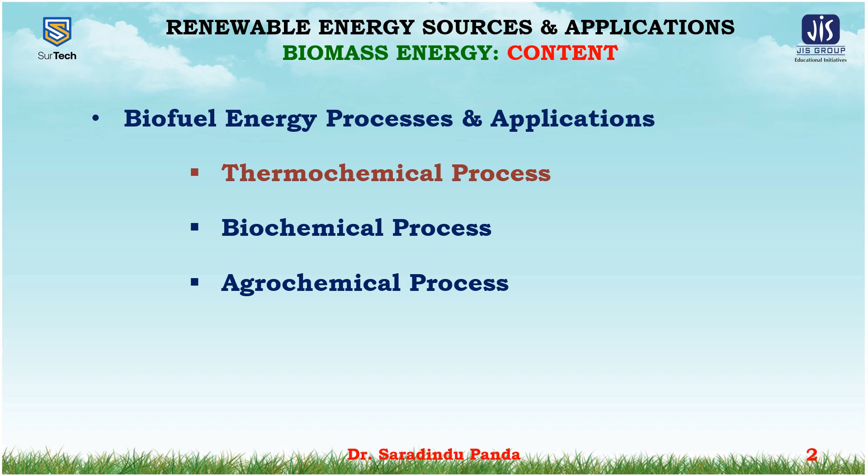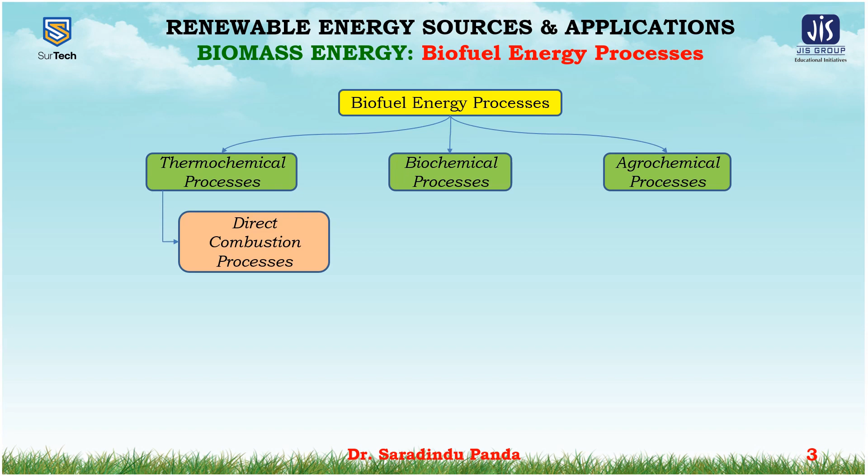In my today's lecture, I want to discuss the biofuel energy processes and applications. This is the continuation lecture of the previous lecture on the thermochemical processes. In the previous lecture, I already described direct combustion processes of the thermochemical processes. In my today's lecture, I want to discuss the pyrolysis process and the other thermochemical processes. In future, I want to discuss the biochemical processes and the agrochemical processes.

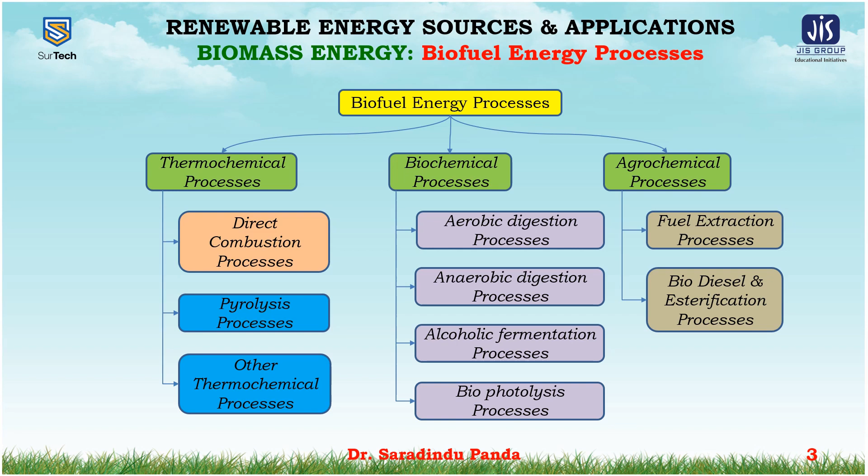So now come to the pyrolysis. Pyrolysis is called the destructive distillation. The pyrolysis is a general term for all the processes whereby the organic material is heated or partially combusted with the minimal air to produce the secondary fuels and the chemicals products.

Biomass pyrolysis is the thermal decomposition of the biomass occurring in the absence of oxygen. It is the fundamental chemical reaction that is the precursor of both the combustion and the gasification processes, and occurs naturally in the first 2 seconds.

The input may be wood, biomass residues, and municipal waste or indeed coal. The products of the biomass pyrolysis include biochar, bio-oil, and gases including methane, hydrogen, carbon monoxide, and carbon dioxide.

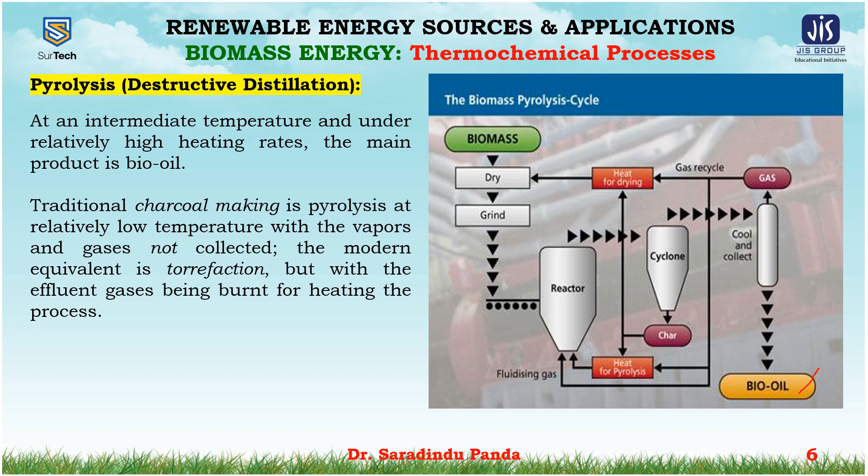Traditional charcoal making is pyrolysis at relatively low temperature with the vapors and gases not collected. The modern equivalent is the torrefaction, but with the effluent gases being burned for heating the process. Gasification is pyrolysis adapted to produce a maximum amount of the secondary fuel gases.

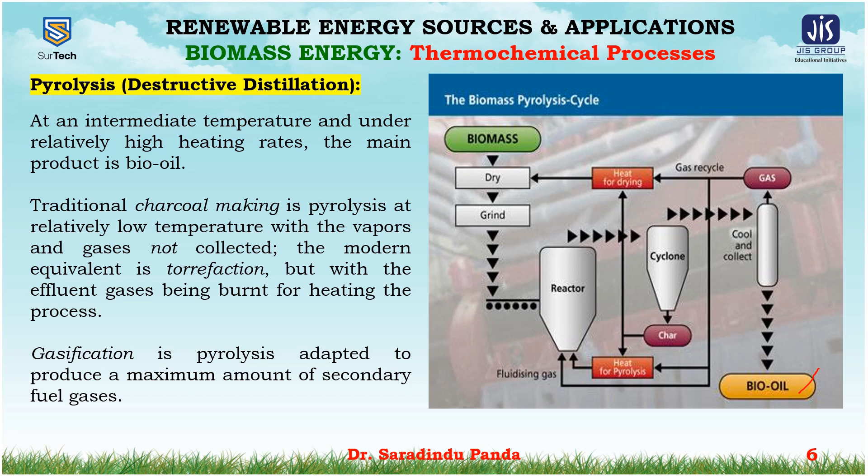Pyrolysis can be performed at relatively small scale and at remote locations, which enhances the energy density of the biomass resource and reduces the transport and handling cost. Pyrolysis offers a flexible and attractive way of converting solid biomass into an easily stored and transported liquid, which can be successfully used for the production of heat, power, and chemicals.

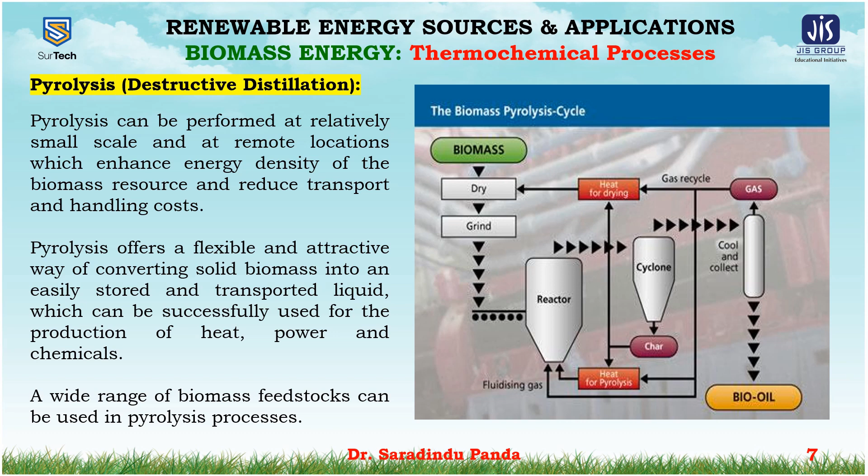A wide range of biomass feedstocks can be used in the pyrolysis processes. The pyrolysis process is very dependent on the moisture content of the feedstock, which should be around 10%. The efficiency is measured as the heat of combustion of the secondary fuels produced divided by the heat of combustion of the input biomass as used.

Large efficiencies of 80 to 90% can be reached. For instance, gasifiers from wood can produce 80% of the initial energy in the form of combustible gas, predominantly hydrogen and carbon monoxide producer gas, suitable for operation in converted petroleum fuel engines.

In this way, the overall efficiency of electricity generation, say 80% into 30%, that is 24%, could be greater than that obtained with a steam boiler. Such gasifiers are potentially useful for small scale power generation, which is less than 150 kilowatt.

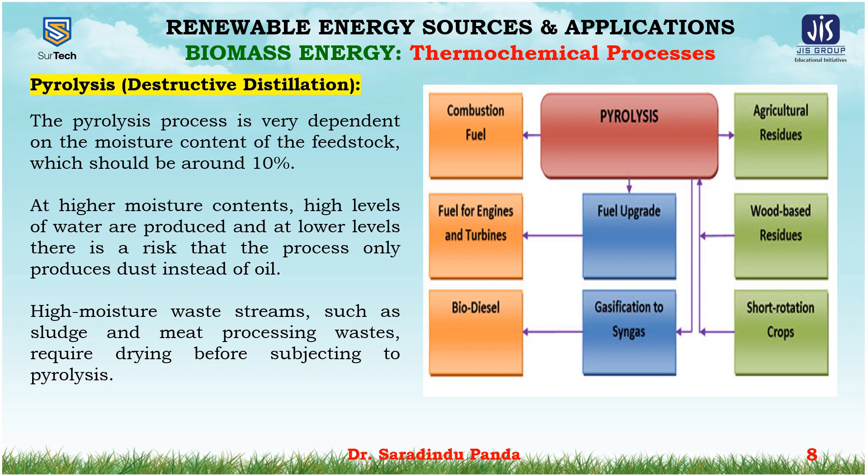At higher moisture contents, high levels of water are produced, and at lower levels there is a risk that the process only produces dust instead of oil. High moisture waste streams such as sludge and meat processing waste require drying before being subjected to the process.

Efficiency and the nature of the pyrolysis process is dependent on the particle size of the feedstock. Most pyrolysis technologies can only process small particles to a maximum of 2 mm, keeping in view the need for rapid heat transfer through the particle. The demand for small particle size means that the feedstock has to be size-reduced before being used for pyrolysis. Pyrolysis processes can be categorized as slow pyrolysis or fast pyrolysis.

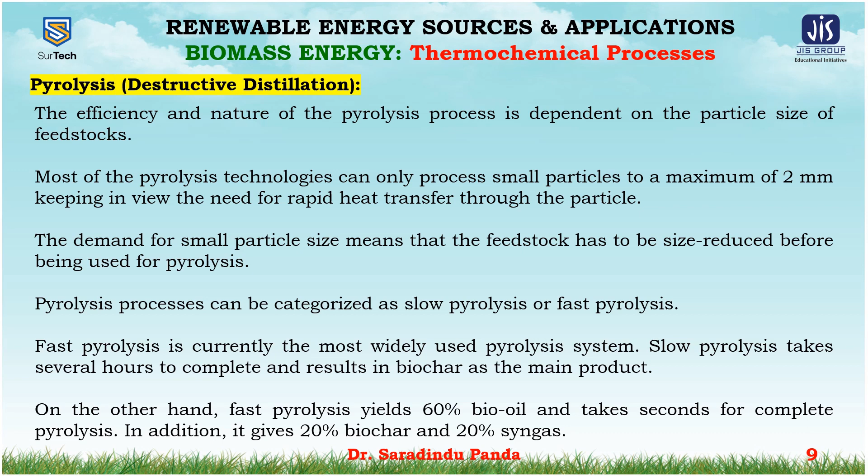Fast pyrolysis is currently the most widely used pyrolysis system. Slow pyrolysis takes several hours to complete and results in biochar as the main product. On the other hand, fast pyrolysis yields 60% bio-oil and takes only seconds to complete. In addition, it gives 20% biochar and 20% syngas.

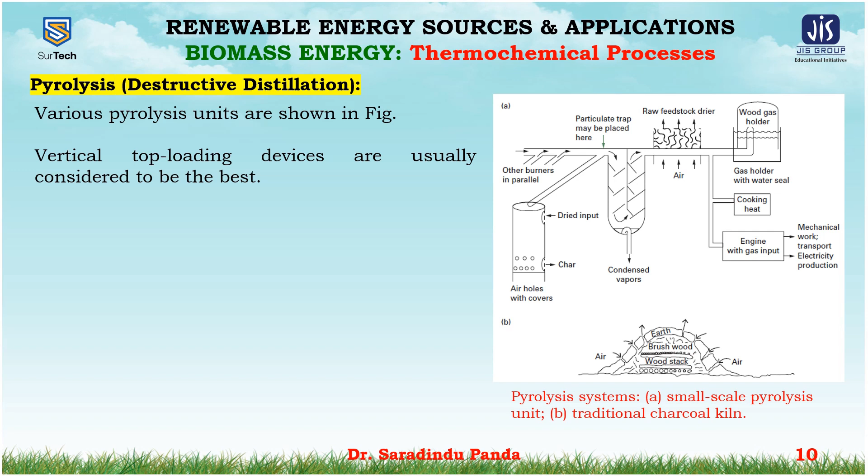Vertical top loading devices are usually considered the best. The fuel products are more convenient, clean and transportable than the original biomass. The chemical products are important as chemical feedstock for further processes or as directly marketable goods.

Partial combustion devices, which are designed to maximize the amount of combustible gas rather than the char or the volatiles, are usually called gasifiers.

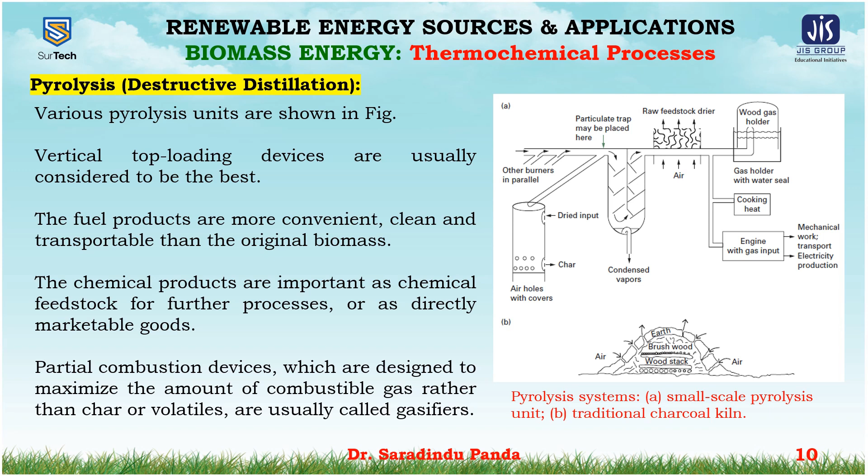The chemical processes in pyrolysis are closely related to similar distillations of coal to produce synthetic gases, tars, oils and coke. For instance, the large-scale use of piped town gas, like hydrogen and carbon monoxide, in Europe before the change to fossil natural gas, mainly methane, was possible from the reaction of water on heated coal with reduced air supply: H2O plus C equals H2 plus CO, and C plus O2 equals CO2, and CO2 plus C equals 2CO.

The input materials need to be graded to remove excessive non-combustible material, like soil or metal, dried if necessary. Usually completely dry material is avoided with gasifiers, unlike boilers, chopped or shredded and then stored.

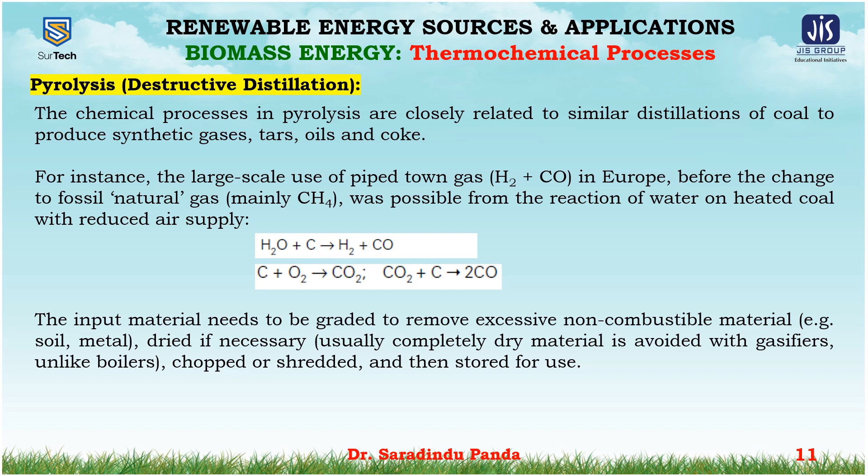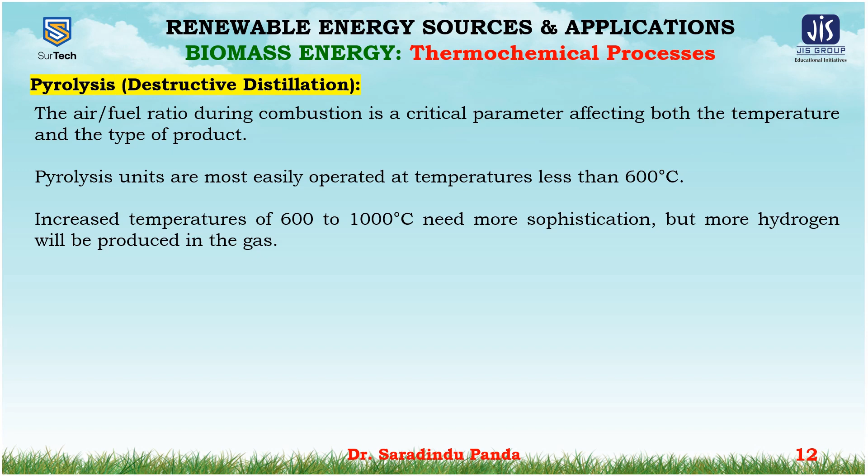The air to fuel ratio during combustion is a critical parameter affecting both the temperature and the type of product. Pyrolysis units are most easily operated at temperatures less than 600 degrees centigrade. Increased temperatures of 600 to 1000 degrees centigrade need more sophistication, but more hydrogen will be produced in the gas.

At less than 600 degrees centigrade, there are generally 4 stages in the distillation process. Number 1 is 100 to 120 degrees centigrade: the input material dries with the moisture passing up through the bed.

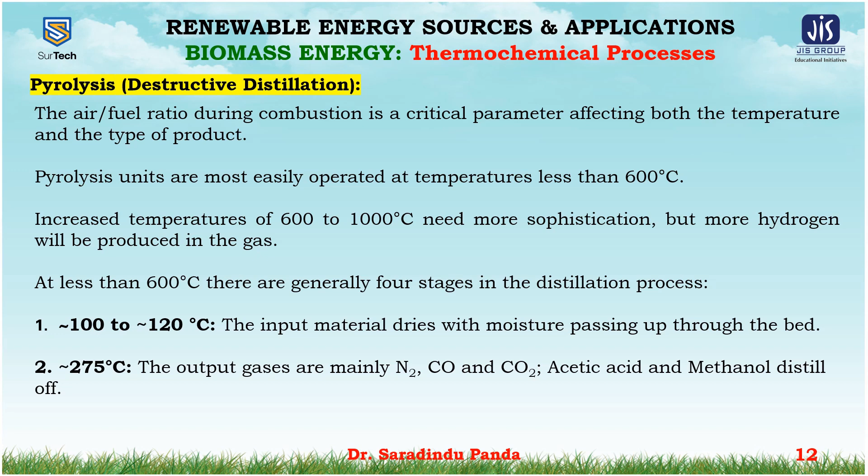Second is approximately 275 degrees centigrade. The output gases are mainly nitrogen, carbon monoxide, carbon dioxide, acetic acid, and methanol distillate.

Third is 280 to 350 degrees centigrade. Exothermic reactions occur in this range, driving off complex mixtures of chemicals like ketones, aldehydes, phenols and esters, carbon dioxide, carbon monoxide, methane, ethane and hydrogen.

Certain catalysts like zinc chloride enable these reactions to occur at lower temperature.

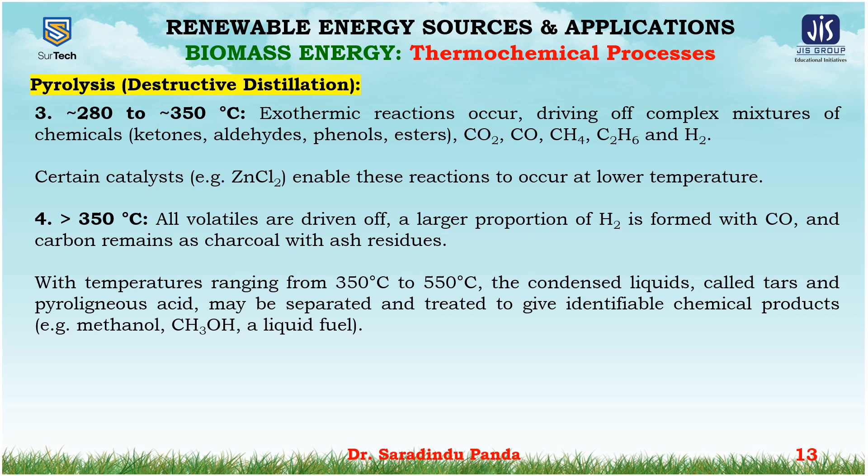Greater than 350 degrees centigrade, all the volatiles are driven off. A larger proportion of hydrogen is formed with carbon monoxide, and the carbon remains as charcoal with ash residues. With temperatures ranging from 350 to 550 degrees centigrade, the condensed liquids called tars and pyroligneous acid may be separated and treated to give identifiable chemical products like methanol, CH3OH, a liquid fuel.

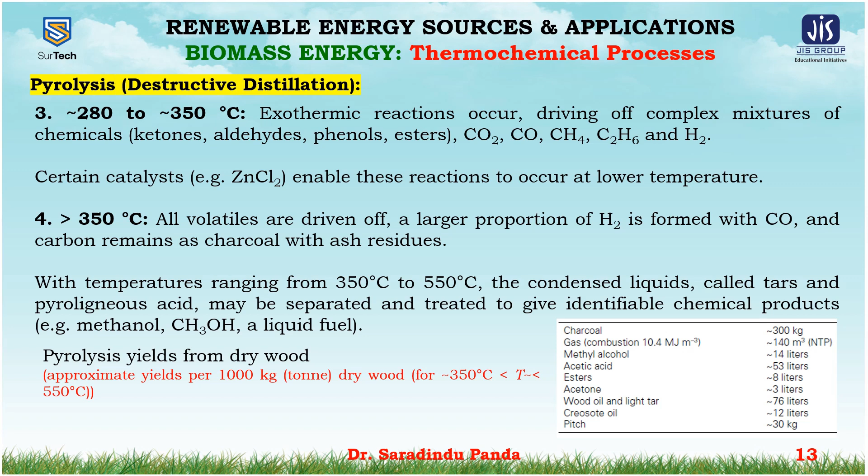The charcoal is 300 kg, the gas is 140 cubic meters, methyl alcohol is 14 liters, acetic acid is 53 liters, esters 8 liters, acetone 3 liters, wood oil 76 liters, and creosote oil is 12 liters and pitch is 30 kg.

Now, pyrolysis destructive distillation: the solid charcoal mass yield is 25 to 35% maximum. Modern charcoal retorts operating at about 600 degrees centigrade produce 25 to 35% of the dry matter biomass as charcoal.

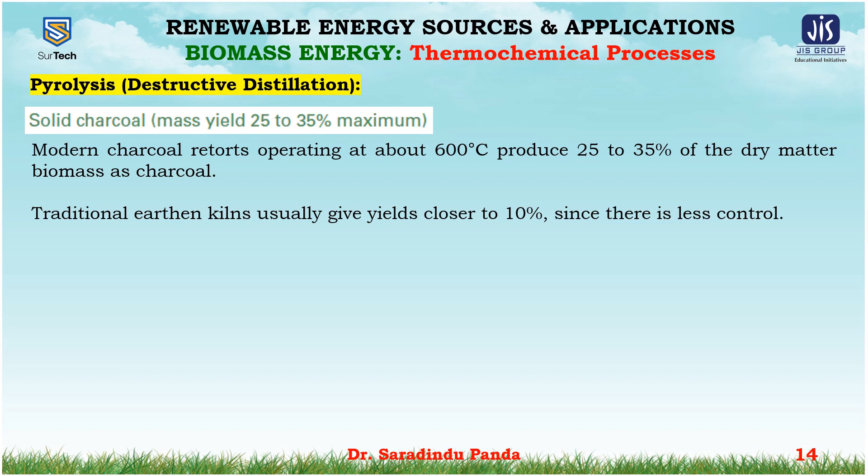Traditional earthen kilns usually give yields closer to 10% since there is less control.

Charcoal is 75 to 85% carbon unless great care is taken to improve the quality, and the heat of combustion is about 30 megajoules per kg.

Thus, if charcoal alone is produced from wood, between 15 and 50% of the original chemical energy of combustion remains. Charcoal is useful as a clean, controllable fuel.

Chemical grade charcoal has many uses in laboratory and industrial chemical processes. Charcoal is superior to coal products for making high quality steel.

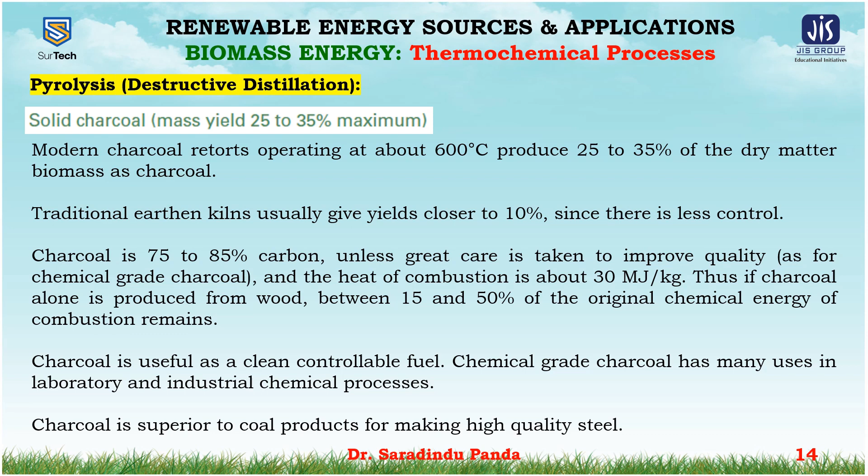Now torrefaction. This is a form of pyrolysis at reduced temperature, 200 to 320 degrees centigrade, with the effluent gases being used for heating. The product is a dry, non-rotting solid char, sometimes called biocoal, that subsequently can be burnt efficiently with minimum pollution.

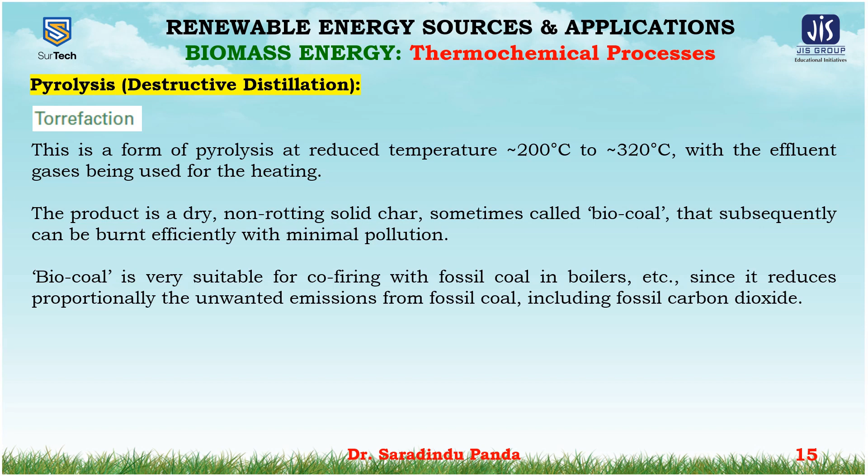Biocoal is very suitable for co-firing with fossil coal in boilers, since it proportionally reduces the unwanted emissions from the fossil coal, including fossil carbon dioxide.

Typically, the product retains 80% of the mass and 90% of the heating value of the original biomass. Its characteristics can be improved further by densification.

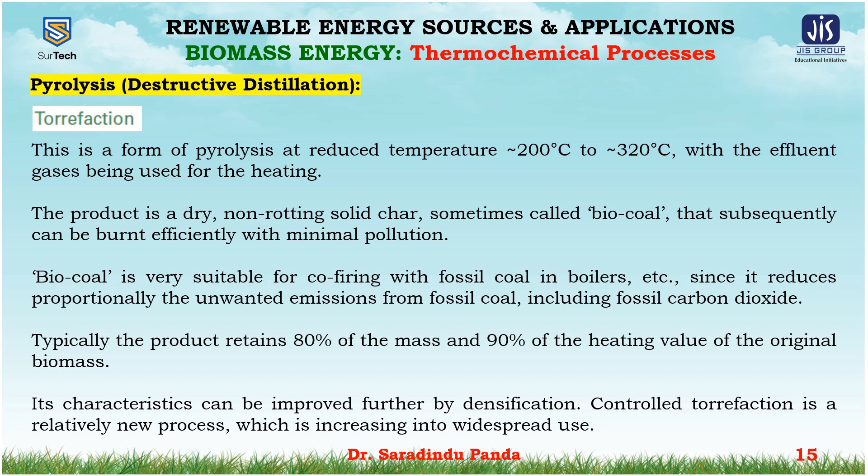Controlled torrefaction is a relatively new process which is increasingly coming into widespread use.

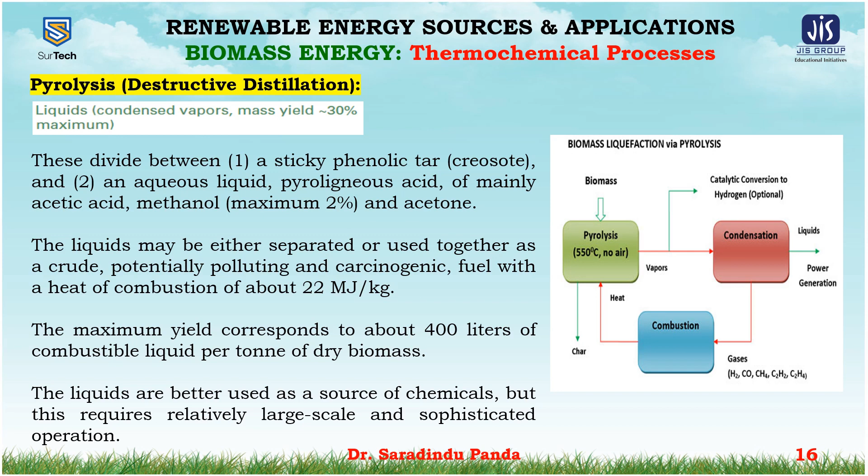The liquid condensed vapor mass yield 30% maximum in pyrolysis. These divide between a sticky phenolic tar called creosote and an aqueous liquid called pyroligneous acid, consisting mainly of acetic acid, methanol (maximum 2%), and acetone. The liquids may be either separated or used together as a crude, potentially polluting and carcinogenic fuel, with a heat of combustion of about 22 megajoules per kg. The maximum yield corresponds to about 400 liters of combustible liquid per ton of dry biomass.

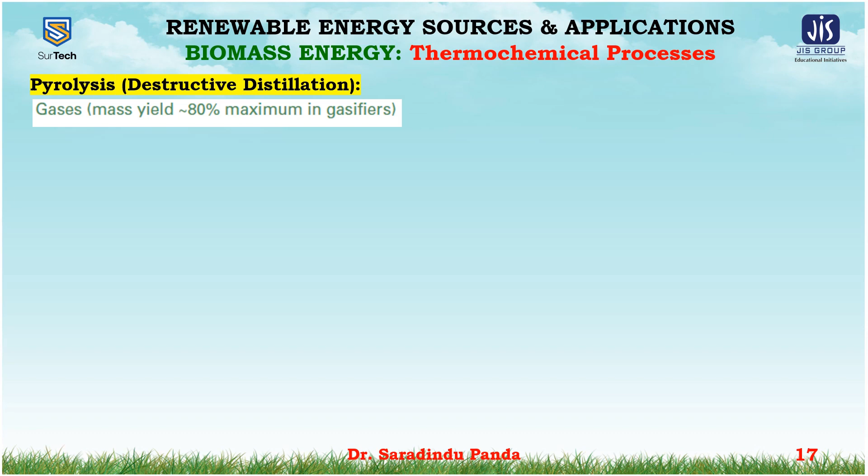The gases mass yield 80% maximum in the gasifiers. The mixed gas output with nitrogen is known as wood gas, synthesis gas, producer gas, or water gas, and has a heat of combustion in air of 5 to 10 megajoules per cubic meter. It may be used directly in diesel cycle or spark ignition engines with adjustment of the fuel injector or carburetor, but extreme care must be taken to avoid intake of ash and condensable vapors. The gas is mainly nitrogen, hydrogen, carbon monoxide, with perhaps a small amount of methane. The gas may be stored in gas holders near atmospheric pressure, but this is not convenient.

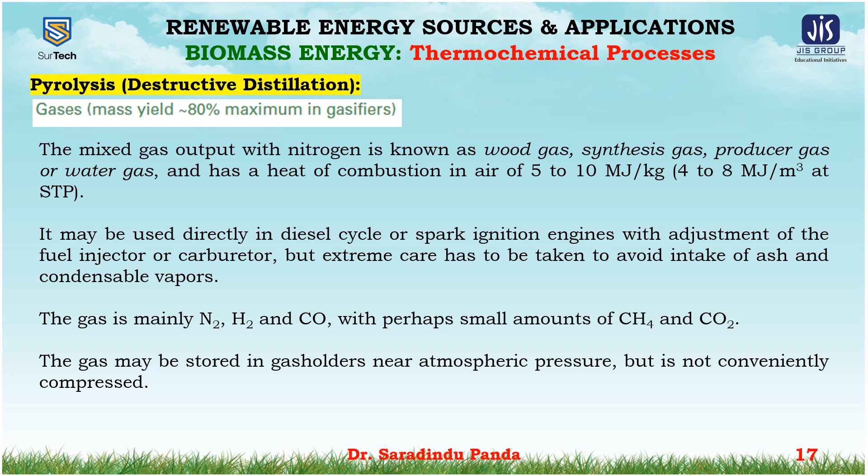A much cleaner and more uniform gas may be obtained by gasification of charcoal rather than wood, since the majority of the tars from the original wood have already been removed.

The Fischer-Tropsch process is a general term for a wide variety of methods that convert carbon monoxide and hydrogen, the main gases of synthesis gas, like producer gas, into fuel suitable for vehicles. Coal has been the starter material used to generate the initial producer gas, but biomass can also be the starter material.

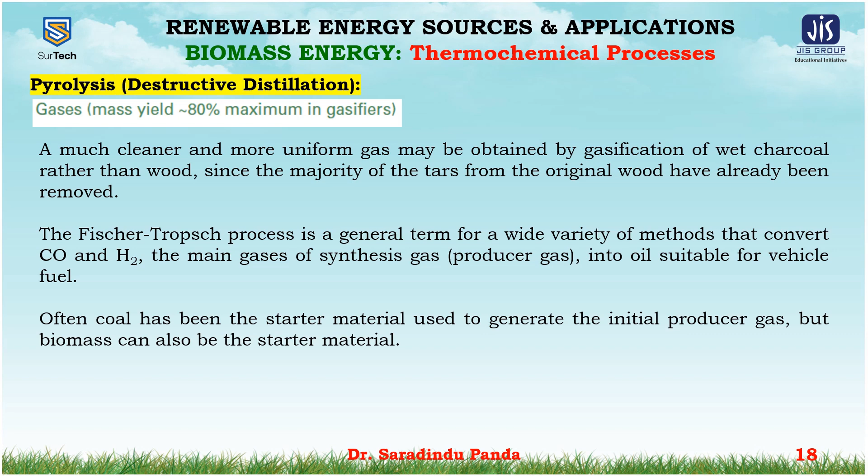Now let's come to gasification. The term gasification commonly refers to high temperature thermochemical conversion, with the product gas called producer gas. It involves burning the biomass without sufficient air for full combustion, but with enough air to convert the solid biomass into a gaseous fuel. This is the gasifier.

The producer gas consists primarily of carbon monoxide, hydrogen, carbon dioxide, and nitrogen, and has a heating value of 4 to 6 megajoules per cubic meter, or 10 to 15% of the heating value of natural gas.

The gasification of biomass takes place in a restricted supply of oxygen and occurs through initial devolatilization of the biomass, combustion of the volatile material and char, and further reduction to produce a fuel gas rich in carbon monoxide and hydrogen. This combustible gas has a lower calorific value than natural gas but can still be used as fuel for boilers, engines, and potentially for combustion turbines after cleaning the gas stream of tars and particulates.

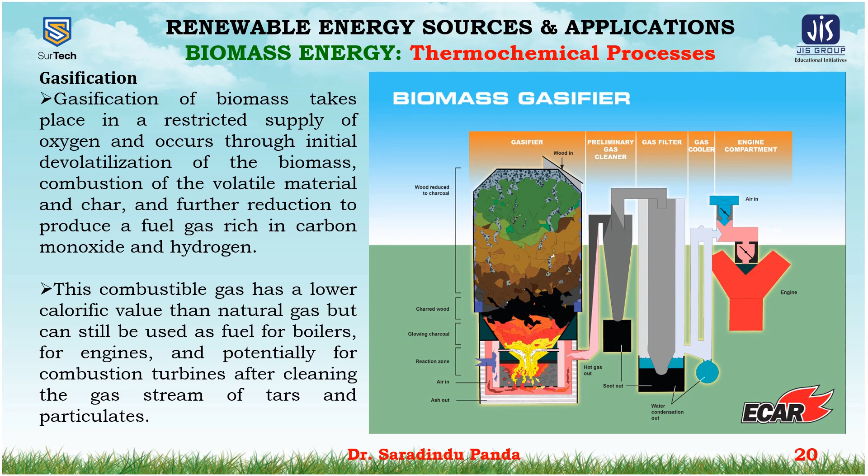The intended use of the gas and the particular characteristics of the biomass—its size, texture, and moisture content—determine the design and operating characteristics of the gasifier and associated equipment. The gas is cooled, then cleaned, then it goes to gas utilization or the engine.

If the gasifiers are air blown, the atmospheric nitrogen dilutes the fuel gas to a level of 10 to 14% of the calorific value of natural gas. Oxygen and steam blown gasifiers produce a gas with a somewhat higher calorific value. Pressurized gasifiers are under development to reduce the physical size of the major equipment items.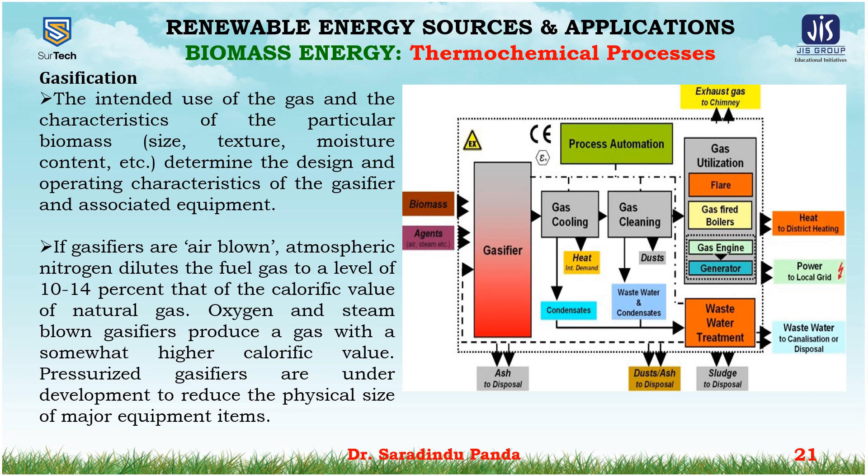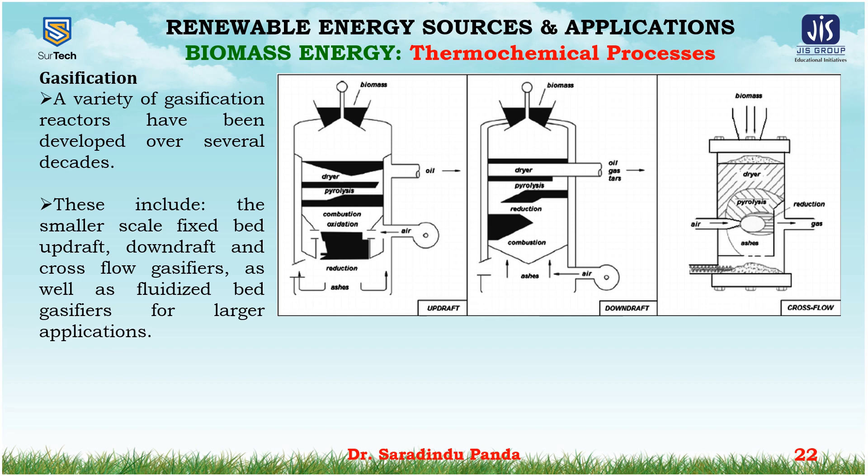There are three types of gasifiers: updraft, downdraft, and cross flow. This includes the smaller scale fixed bed updraft, downdraft, and cross flow gasifiers, as well as the fluidized bed gasifiers. Here the fixed bed updraft, downdraft, and cross flow gasifiers are shown in the figure.

At the small scale, downdraft gasifiers are noted for their relatively low tar production but are not suitable for fuels with a low ash melting point. They also require the fuel moisture levels to be controlled.

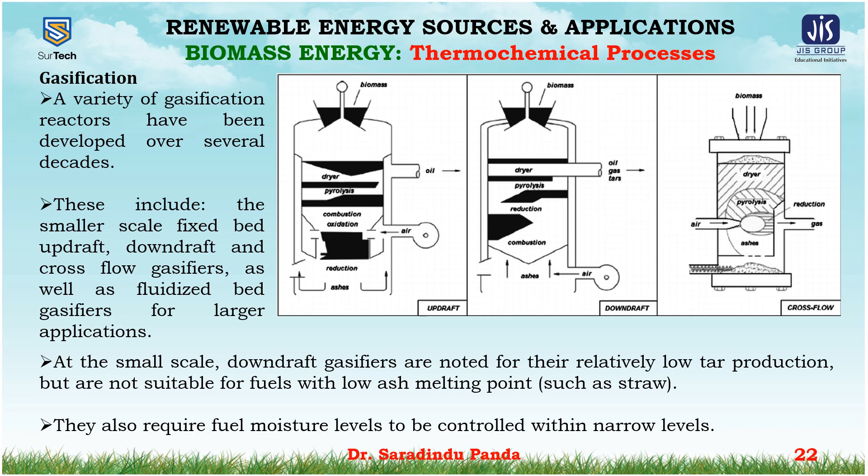Now come to the fixed bed updraft gasifier as shown in the figure. This is the oldest and simplest type of gasifier, the counter current or updraft gasifier. The air intake is at the bottom, and the gas leaves at the top through this exhaust. Near the grate at the bottom, this is the grate.

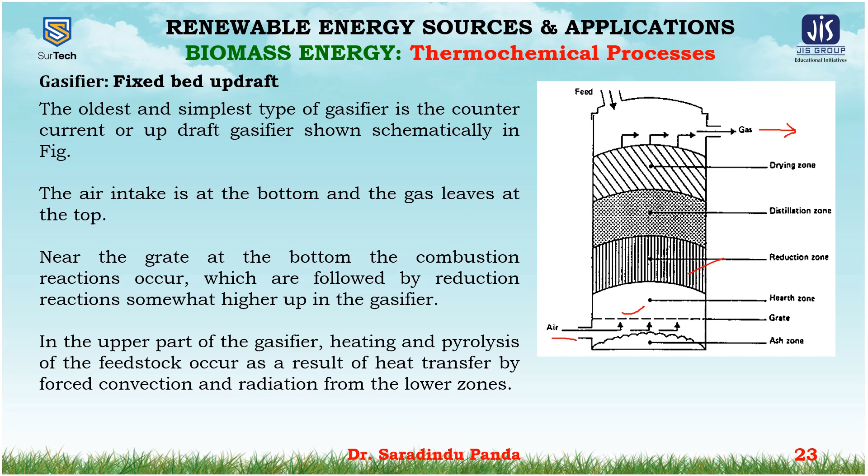The combustion reactions occur near the grate, followed by reduction reactions somewhat higher up in the gasifier; this is the reduction zone. In the upper part of the gasifier, heating and pyrolysis of the feedstock occur due to heat transfer by forced convection and radiation from the lower zones. This is the distillation zone and this is the drying zone.

The tars and volatiles produced during this process will be carried in the gas stream. Ashes are removed from the bottom of the gasifier; this is the ash zone from where the ash is collected.

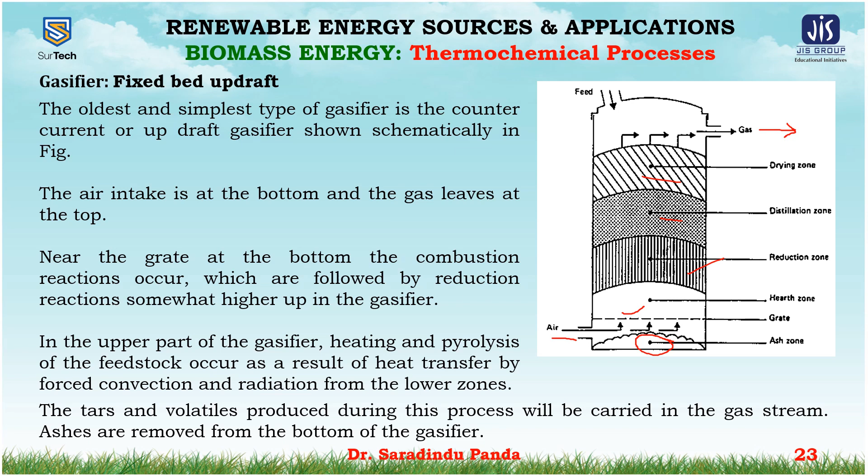Next, the fixed bed updraft. The major advantages of this type of gasifier are its simplicity, high charcoal burnout, and internal heat exchange leading to low gas exit temperatures and high equipment efficiency, as well as the possibility of operation with many types of feedstock like sawdust, cereal hulls, etc.

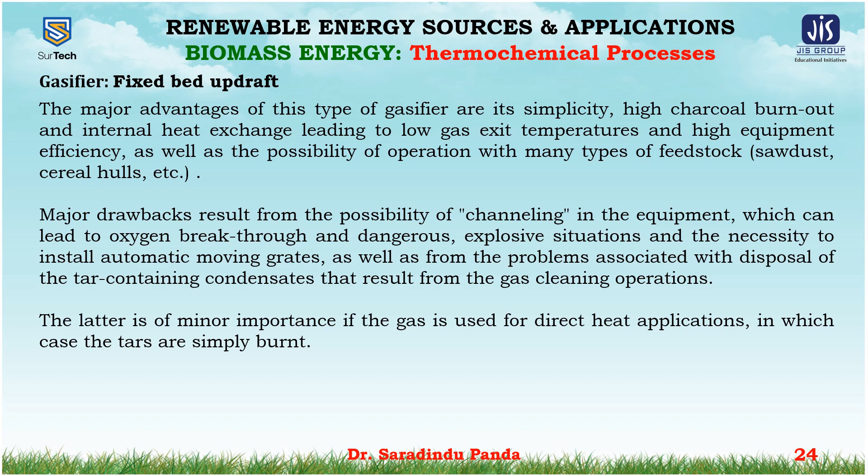Major drawbacks result from the possibility of channeling in the equipment, which can lead to oxygen breakthrough and dangerous explosive situations, and the necessity to install automatic moving grates, as well as problems associated with the disposal of tar-containing condensates that result from gas cleaning operations. The latter is of minor importance if the gas is used for direct heat applications, in which case the tars are simply burned.

Now come to the fixed bed downdraft gasifier. A solution to the problem of tar entrainment in the gas stream has been found by designing the co-current or downdraft gasifiers, in which primary gasification air is introduced at or above the oxidation zone in the gasifier.

The producer gas is removed at the bottom of the apparatus, so that the fuel and the gas move in the same direction, as schematically shown in the figure. This is the air and the gas.

On their way down, the acid and tarry distillation products from the fuel must pass through a glowing bed of charcoal and are therefore converted into the permanent gases: hydrogen, carbon dioxide, carbon monoxide, and methane. Depending on the temperature of the hot zone and the residence time of the tarry vapors, a more or less complete breakdown of the tars occurs.

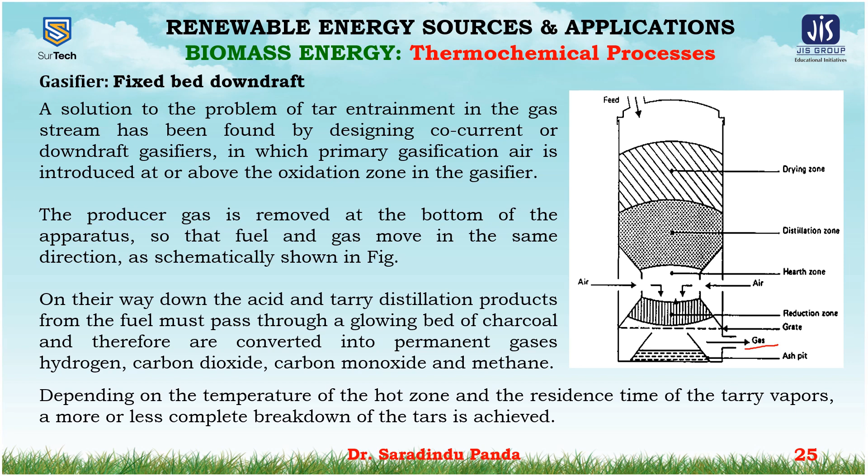The main advantage of downdraft gasifiers lies in the possibility of producing a tar-free gas suitable for engine applications. In practice, however, a tar-free gas is seldom if ever achieved over the whole operating range of the equipment. A tar-free operating turn-down ratio of a factor of 3 is considered standard, while a factor of 5-6 is considered excellent.

Because of the lower level of organic components in the condensate, downdraft gasifiers suffer less from environmental objections than updraft gasifiers. But a major drawback of the downdraft equipment lies in its inability to operate on a number of unprocessed fuels.

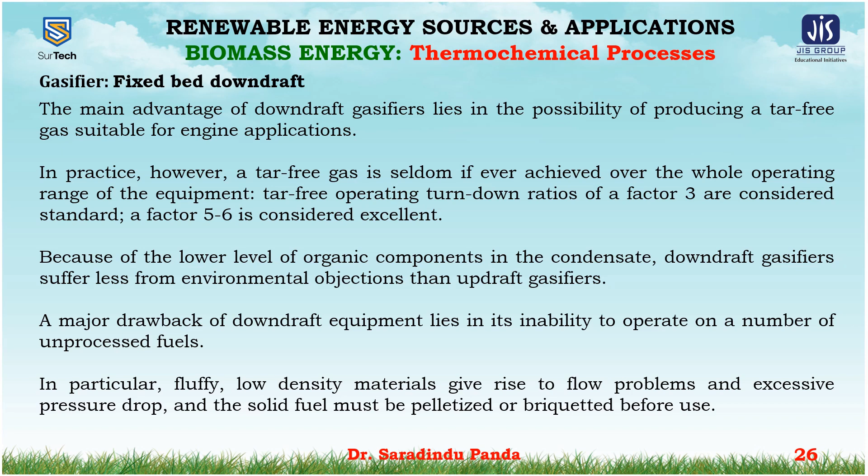In particular, fluffy, low-density materials give rise to flow problems and excessive pressure drop, and the solid fuel must be pelletized or briquetted before use.

Downdraft gasifiers also suffer from problems associated with high ash content fuels, causing slag, to a larger extent than updraft gasifiers.

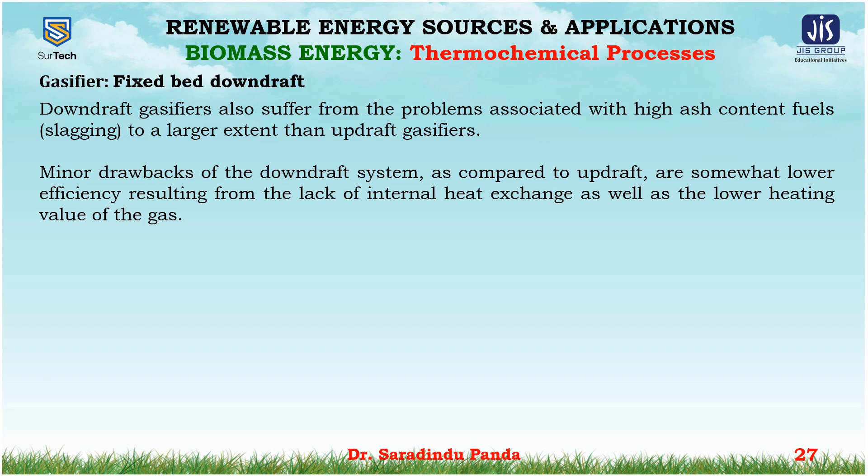Minor drawbacks of the downdraft system compared to the updraft are somewhat lower efficiency resulting from the lack of internal heat exchange, as well as the lower heating value of the gas. Besides this, the necessity to maintain uniform high temperatures over a given cross-sectional area makes it impractical to use downdraft gasifiers in a power range above about 350 kW.

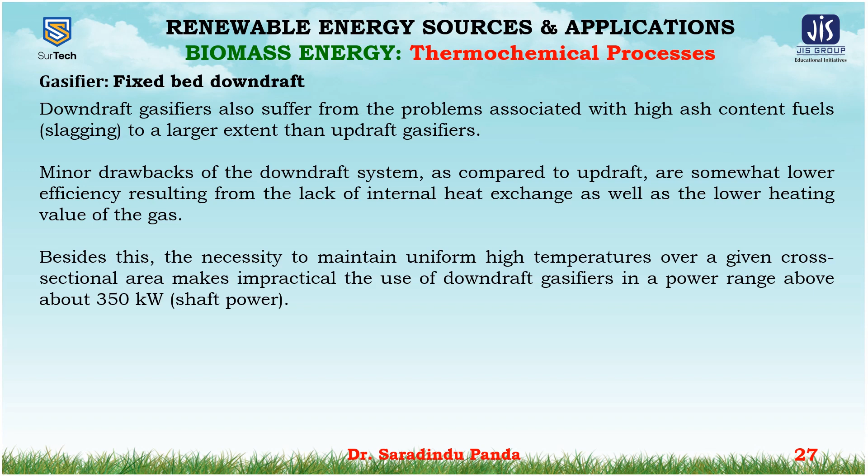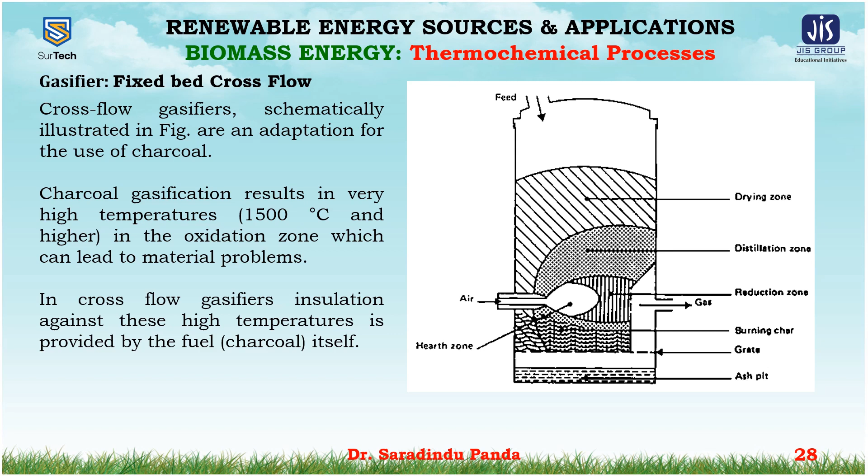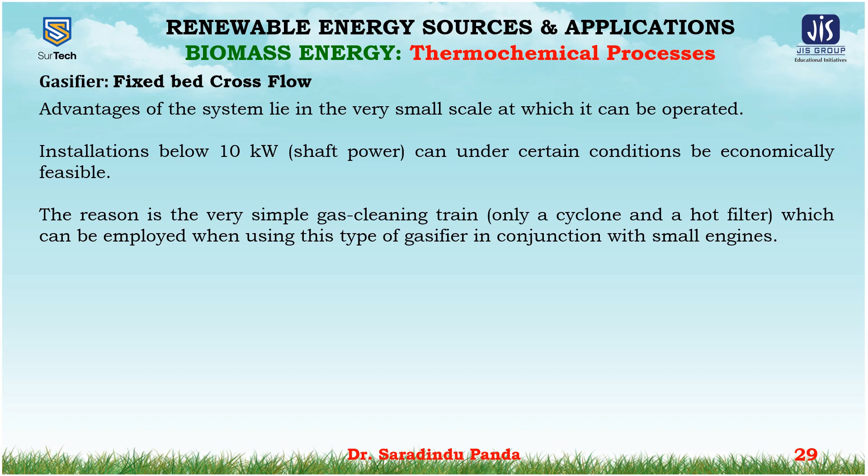Advantages of the system lie in the very small scale at which it can be operated. Installations below 10 kilowatt can under certain conditions be economically feasible, due to the simple gas cleaning train which can be employed with small engines. The disadvantage of cross-flow gasifiers is their minimal tar-converting capabilities and the consequent need for high quality charcoal.

It is because of the uncertainty of the charcoal quality that a number of charcoal gasifiers employ the downdraft principle in order to maintain at least a minimal tar-cracking.

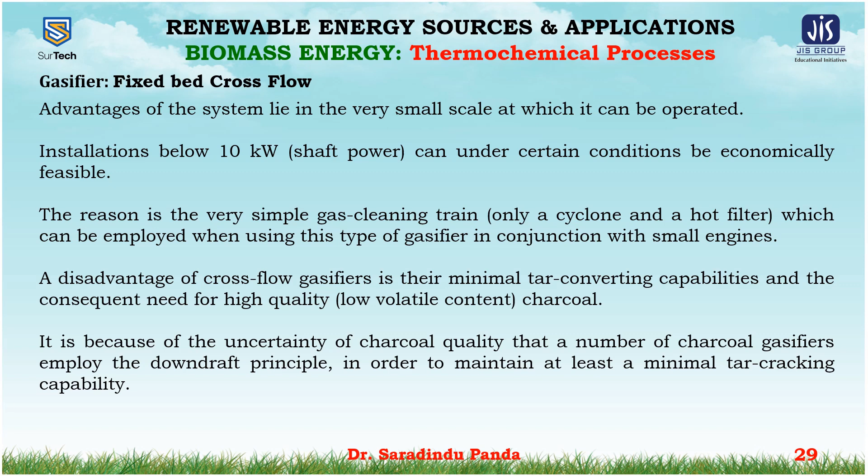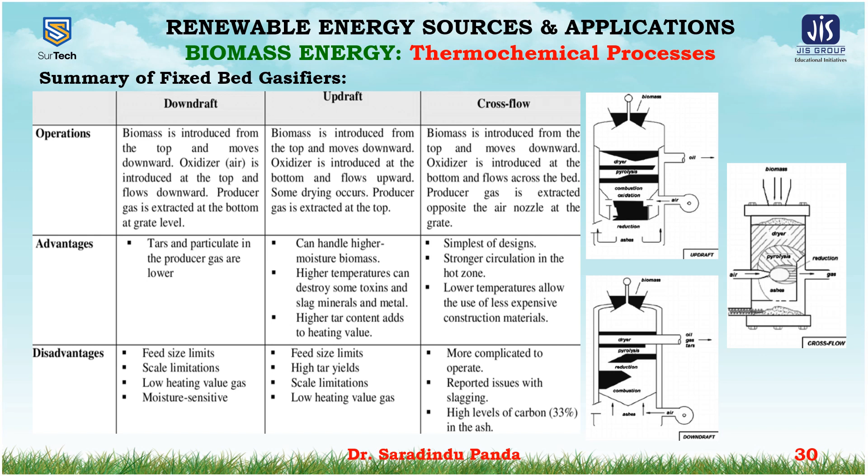Now the second type of gasifier is the fluidized bed gasifier. The operation of both up and downdraft gasifiers is influenced by the morphological, physical and chemical properties of the fuel. Problems commonly encountered are the lack of bunker flow, slagging, and extreme pressure drop over the gasifier.

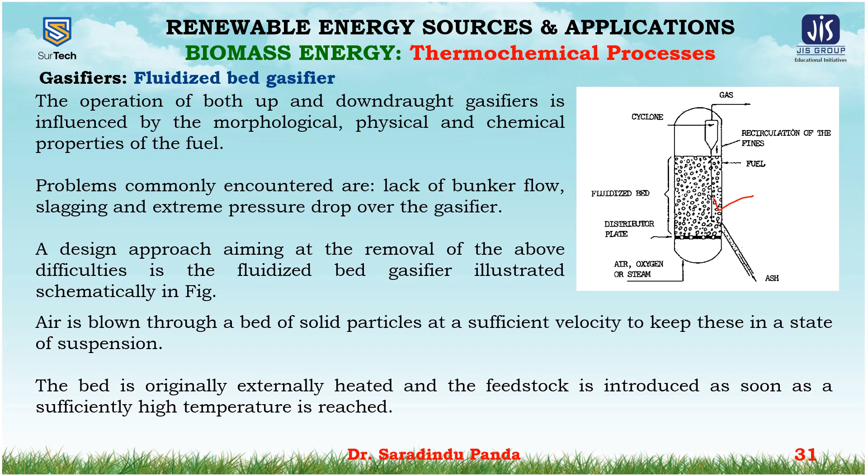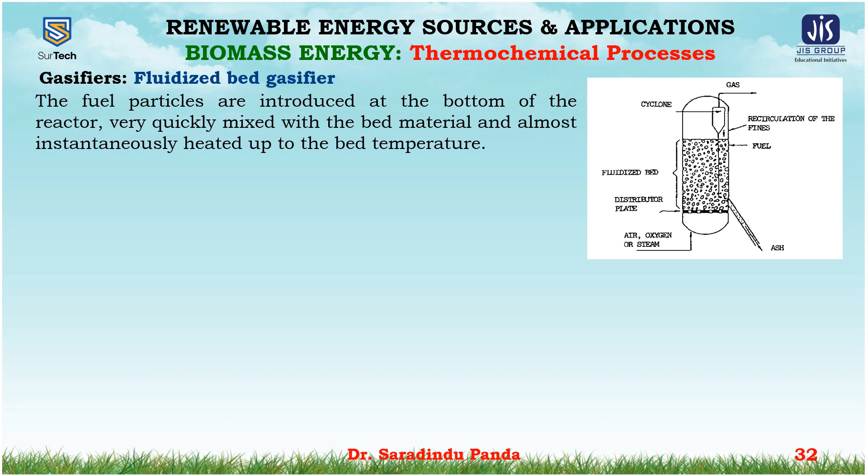The fuel particles are introduced at the bottom of the reactor, very quickly mixed with the bed material, and almost instantaneously heated up to the bed temperature. As a result of this treatment, the fuel is pyrolyzed very fast, resulting in a component mix with a relatively large amount of gaseous materials.

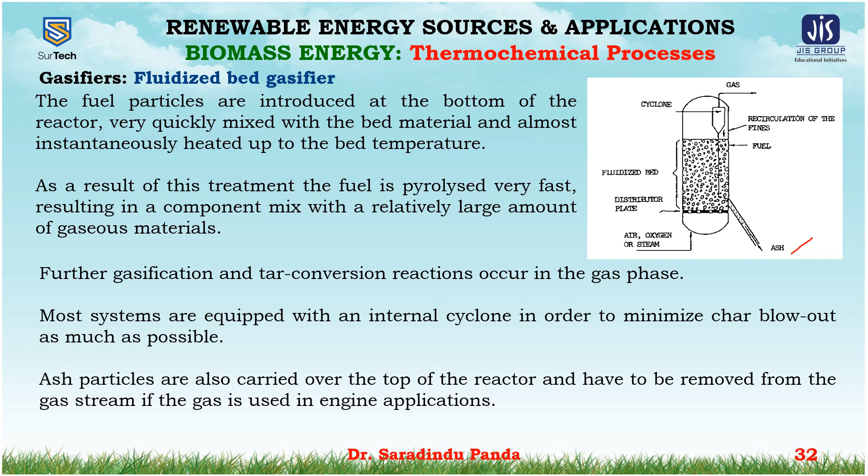Further gasification and tar conversion reactions occur in the gas phase. Most systems are equipped with an internal cyclone in order to minimize the char blowout as much as possible. Ash particles are also carried over the top of the reactor and have to be removed from the gas stream if the gas is used in engine applications.

The major advantage of the fluidized bed gasifiers, as reported by Van der Aarsen and others, is the feedstock flexibility resulting from the easy control of temperature, which can be kept below the melting or fusion point of the ash, and their ability to deal with fluffy and fine-grained materials without the need for pre-processing.

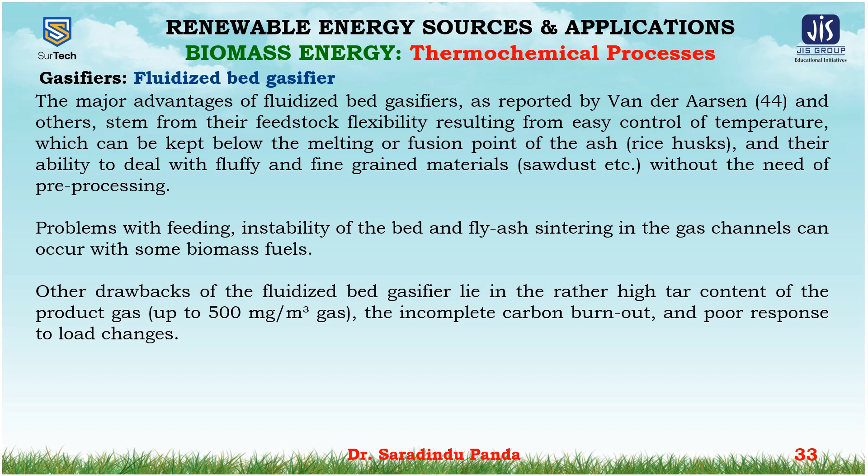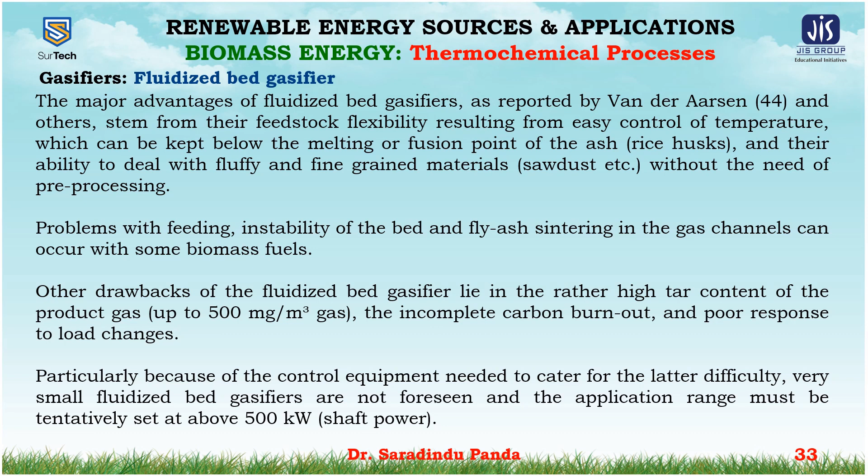Problems with feeding, instability of the bed, and fly ash sintering in the gas channels can occur with some biomass fuels. Other drawbacks of the fluidized bed gasifier lie in the rather high tar content of the product gas, up to 500 mg per cubic meter of gas, the incomplete carbon burnout, and the poor response to load changes, particularly because of the control equipment needed to cater for the latter difficulty. Very small fluidized bed gasifiers are not foreseen, and the application range must be tentatively set above 500 kW.

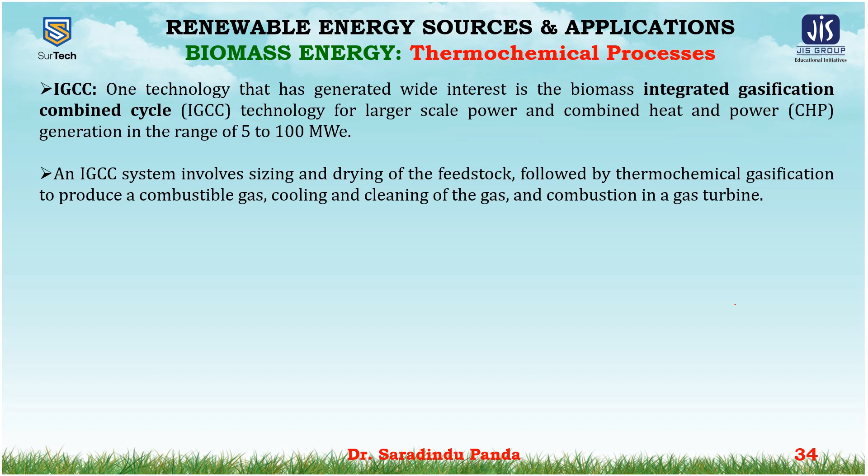The IGCC, one technology that has generated wide interest, is the biomass integrated gasification combined cycle technology for larger scale power and combined heat and power generation in the range of 5 to 100 megawatts. An IGCC system involves sizing and drying of the feedstock followed by thermochemical gasification to produce a combustible gas, cooling and cleaning of the gas, and combustion in a gas turbine.

Steam is raised using the hot exhaust of the gas turbine to drive a steam turbine that generates additional power and/or delivers lower pressure steam for heating purposes. The cascading of a gas turbine and a steam turbine in this manner is commonly called a combined cycle.

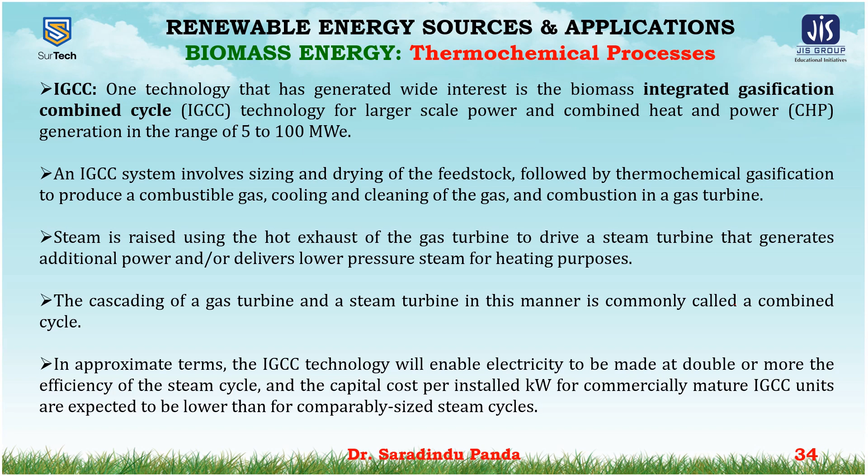In approximate terms, the IGCC technology will enable electricity to be made at double or more the efficiency of the steam cycle, and the capital cost per installed kilowatt for commercially mature IGCC units is expected to be lower than for comparably sized steam systems. Thus, the overall economics of biomass-based power generation are expected to be considerably better with an IGCC system than with a steam Rankine system, especially where the biomass fuel is relatively expensive.

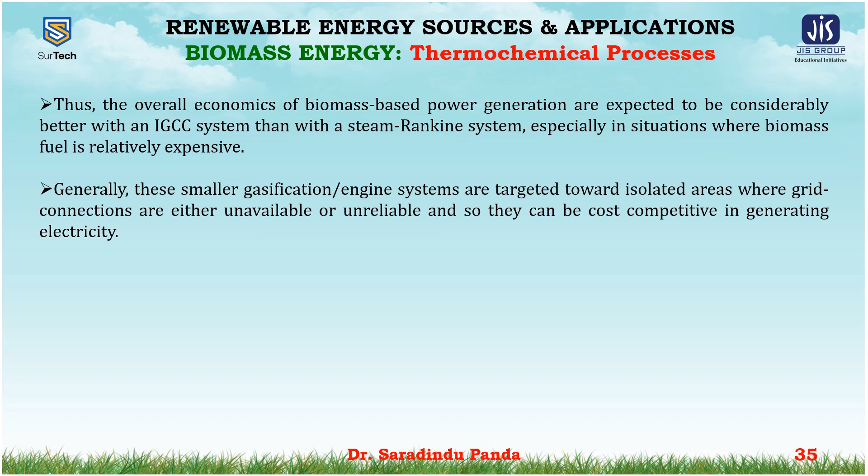Generally, these smaller gasification engine systems are targeted towards isolated areas where grid connections are either unavailable or unreliable, so they can be cost competitive in the generating.

Further thermochemical processes, just like hydrogen reduction: dispersed, shredded or digested biomass, such as manure, is heated in hydrogen to about 600 degrees centigrade under a pressure of about 50 atmospheres. Combustible gas, mostly methane and ethane, is produced that may be burned to give about 6 megajoules per kg of the initial dry material.

Second is hydrogenation with carbon monoxide and steam. The process is as above, but heating is within an enclosure with carbon monoxide and steam to about 400 degrees centigrade and 50 atmospheres. A synthetic oil is extracted from the resulting products that may be used as a fuel.

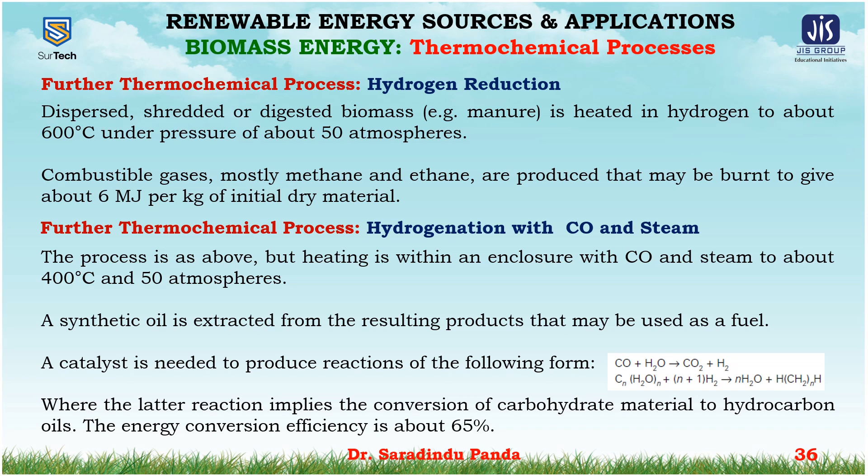A catalyst is needed to produce reactions of the following form: CO plus H2O gives CO2 plus hydrogen. CnH2On plus (n+1) H2 produces nH2O and hydrocarbons, where the latter reaction implies the conversion of carbohydrate material to hydrocarbon oils. The energy conversion efficiency is about 65%.

The third type of thermochemical process is acid and enzyme hydrolysis. Cellulose is the major constituent, 30 to 50% of plant dry biomass, and is very resistant to hydrolysis and hence to fermentation by microorganisms. Conversion to sugars which can be fermented is possible by heating in sulfuric acid or by the action of enzymes, called cellulase, from certain microorganisms. The products may also be used as cattle feed.

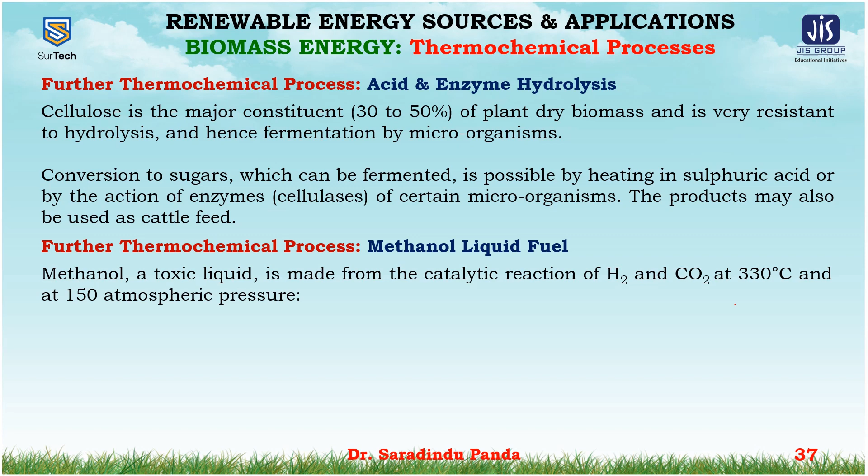Methanol liquid fuel: methanol, a toxic liquid, is made from the catalytic reactions of hydrogen and carbon dioxide at 330 degrees centigrade and 150 atmospheric pressure: 2H2 plus CO equals CH3OH. The input gases are components of synthesis gas and may be obtained from the gasification of biomass.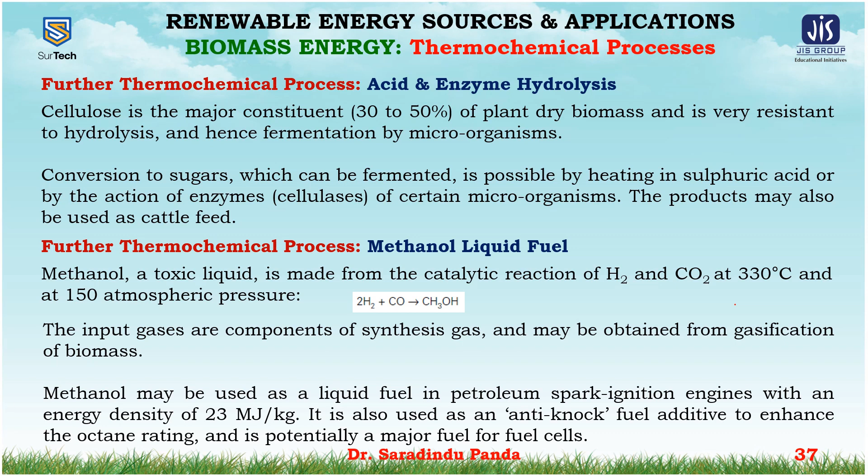Methanol may be used as a liquid fuel in petroleum spark ignition engines with an energy density of 23 megajoules per kg. It is also used as an anti-knock fuel additive to enhance the octane rating, and is potentially a major fuel for fuel cells.

Now, hydrothermal liquefaction, called HTL. HTL is a thermochemical process that seeks to imitate, at greatly increased speed, the processes that turn biomass into fossil fuels over geological periods within the crust of the earth.

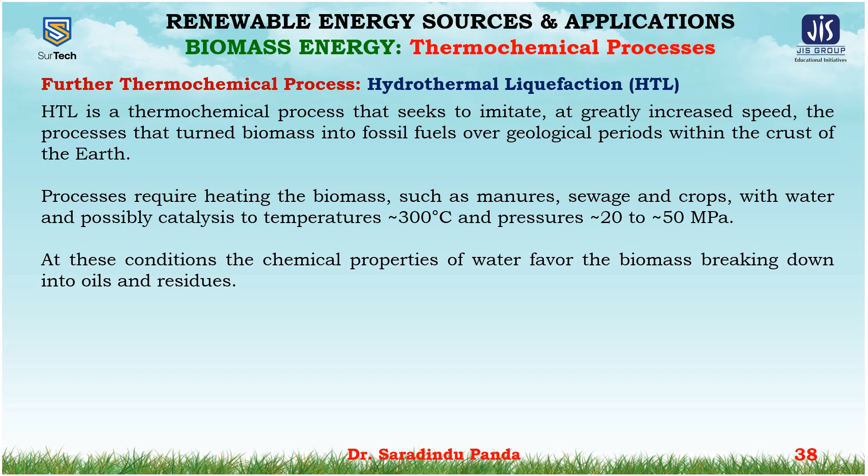The process requires heating biomass such as manures, sewage and crops with water and possibly catalyst to temperatures of 300 degrees centigrade and pressures of 20 to 50 megapascals. At these conditions, the chemical properties of the water favor the biomass breaking down into oils and residues. The chemistry is varied and complex, and the commercial viability of the fuel products to compete generally with conventional biofuels already in the market has not yet been established.